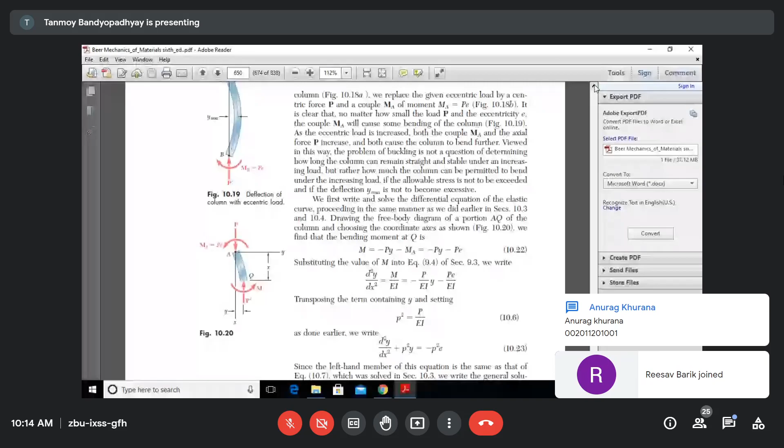Okay, so look at this here. This is the thing that we discussed in columns. Same thing will apply, what you were saying, I'm explaining the same. See, initially the things that we did, we always observed that whenever you are loading the thing, it's along the z direction - meaning there is no eccentricity of the thing actually.

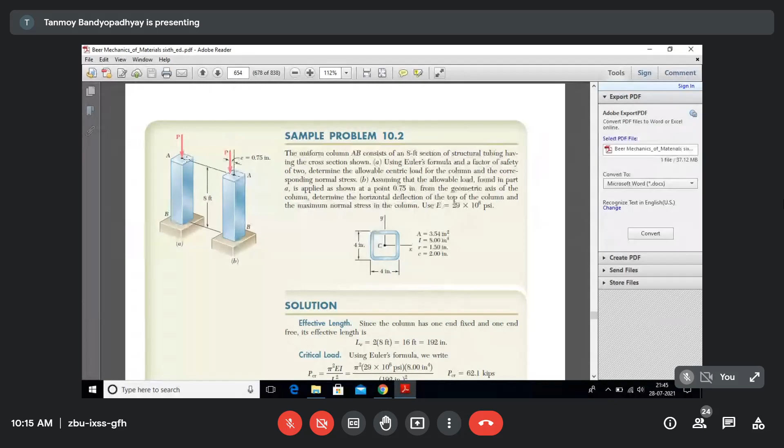But if the load is eccentric, you can see on figure B, the load has been placed eccentrically at a distance of small e. So along with the normal stress you will be having some bending being set up. So that bending moment you have to add on, whether it is tensile or compressive, it will be directly added to the normal stress that is getting developed. So this is the derivation - you can see in this figure, a column with eccentric load.

So for a column with eccentric loading, the eccentricity was small e, and they had drawn an equivalent thing, shifting the load to point C, using the moment couple principle expression that we study in mechanics.

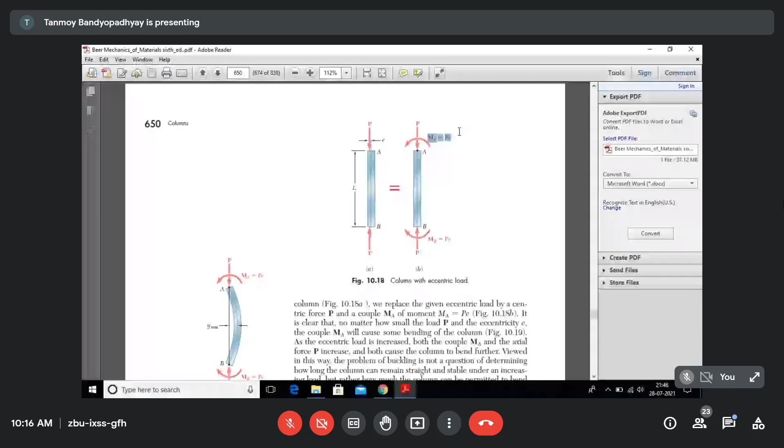Using the moment couple principle, we have to move this force. If I move the load from the eccentric point to the central point, a moment will be induced equal to P into e. You have studied this, the moment couple principle, and we need to find the equivalent moment.

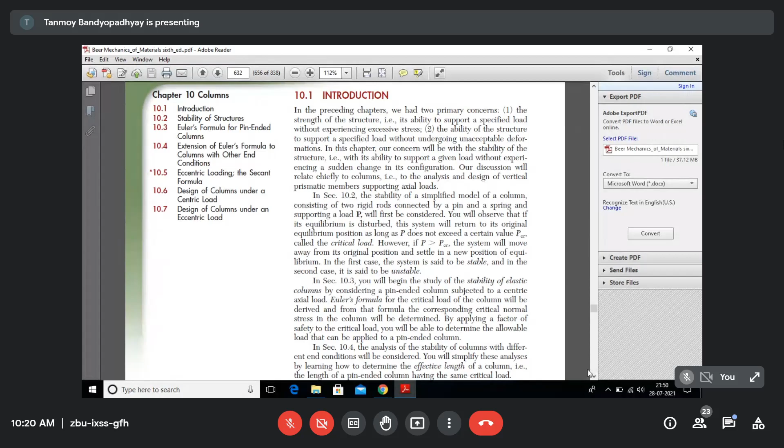So whenever you are loading a column, there is a problem with its stability. If it's a long column, mostly what happens is different from a short column - suppose a brick, a very small piece, doesn't have that length to buckle and all. So if you apply a compressive load to it, it breaks by compression.

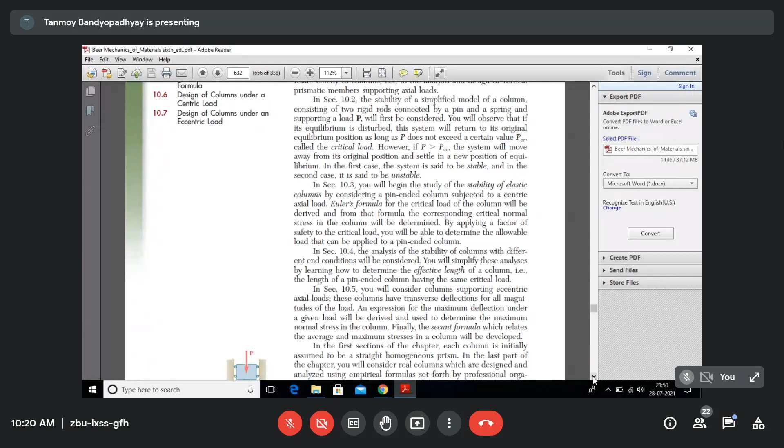But suppose you have a long member, like any column or vertical member. If you compress it, the failure won't entirely be by compression. There will be a buckling effect set up, so it will actually try to bend out. This bending can itself induce failure, not by crushing, but by bending. That lateral direction failure, we call buckling.

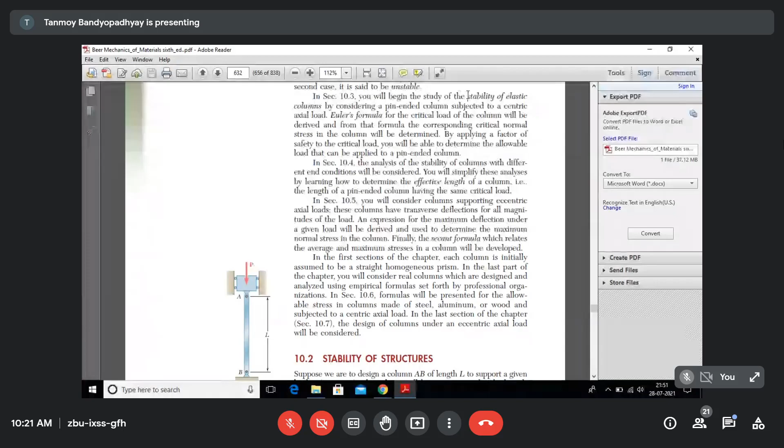So generally it is known as the stability of the elastic column. We have considered that the columns are elastic in nature, and whatever the stability is.

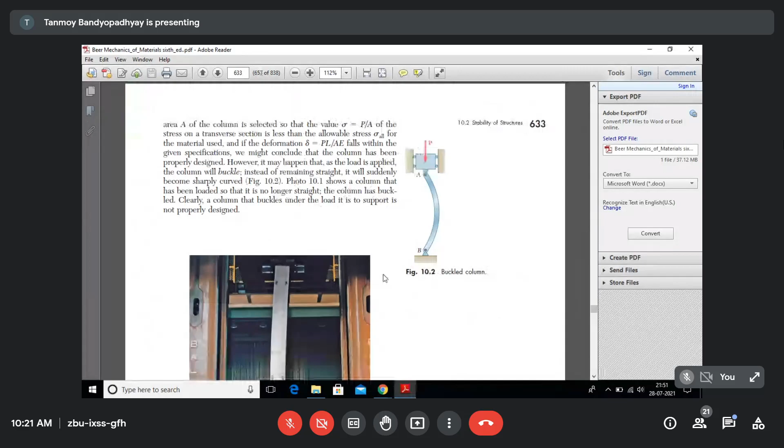In order to arrive at the stability, what we assume is that the column is made up of like a torsional spring. Suppose there is a torsional spring and you are compressing the column AB. We can suppose it is made up of two parts, AC and BC, and at joint C they are joined by a torsional spring of constant K.

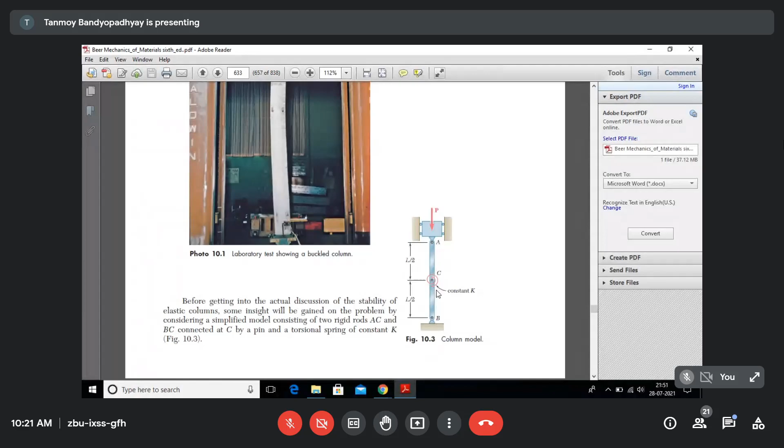So now if I keep compressing, the torsional spring will try to bring it back to its original position whenever it tries to bend, until a point comes where the torsional stiffness becomes insufficient to prevent the buckling of the column, and the column will fail by buckling.

Alright? Hello? Hello, yes sir, alright?

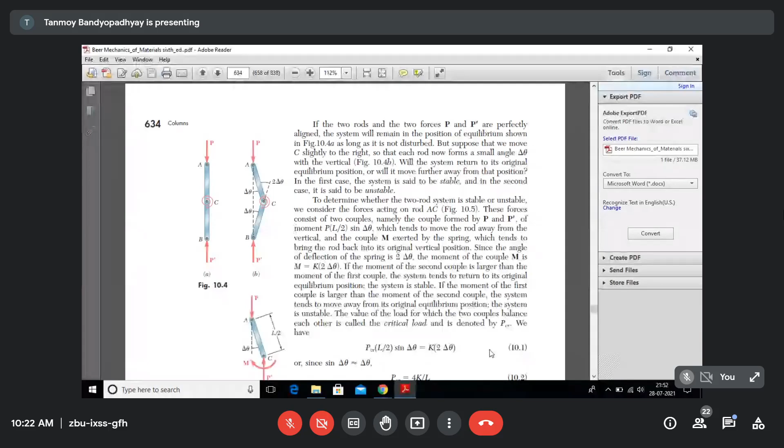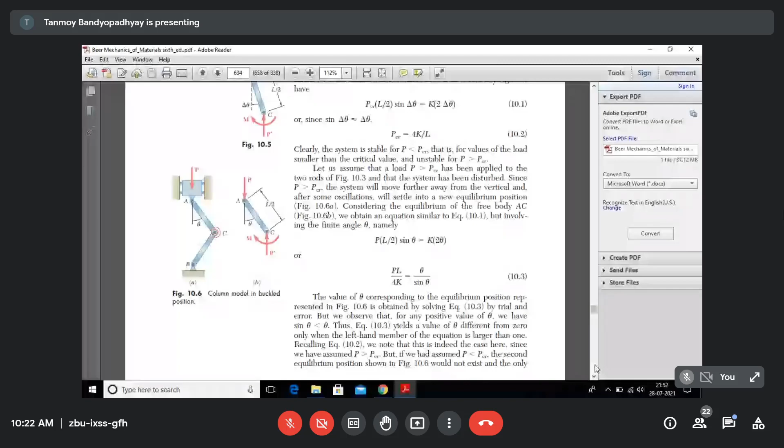Based on that, what we have is something known as the P critical load. If there is a critical load and it exceeds that, it will fail by buckling, or else it will fail by compression. So that's P by P critical we calculate. If P is less than P critical, the column will be stable, and if P is greater than P critical, the column will buckle.

So then we have to consider buckling. Alright, so initially it was a straight line, then after that you have to consider Euler's curve and all those things. Euler's curve is applicable after 89, as you have seen, like LE by K.

The Euler's curve becomes applicable after you cross the limit like LE by K. But for LE by K very small, the leading factor is a straight line, which is the compressive strength. Sigma Y is the compressive strength of the material, that is 250 megapascal. So less than 89, it will fail by compression.

And if you go on increasing the length of the column, or LE by K, as I told, K is the radius of gyration. If you go on increasing LE by K, initially it's governed by a straight line, and after this point 89, if you increase the length further, it switches to a long column. The buckling effect creeps in, where you have to consider sigma critical using Euler's curve, so it becomes a hyperbolic curve.

Here, columns can have many types of pin conditions, end conditions of the column. You could be having various end conditions of the column, and for all the end conditions we have derived the expressions.

For the pinned column, you have to just take a cross section at a point Q, then calculate the forces, and write the differential expression for that. Then, mathematically, you have to analyze that differential expression.

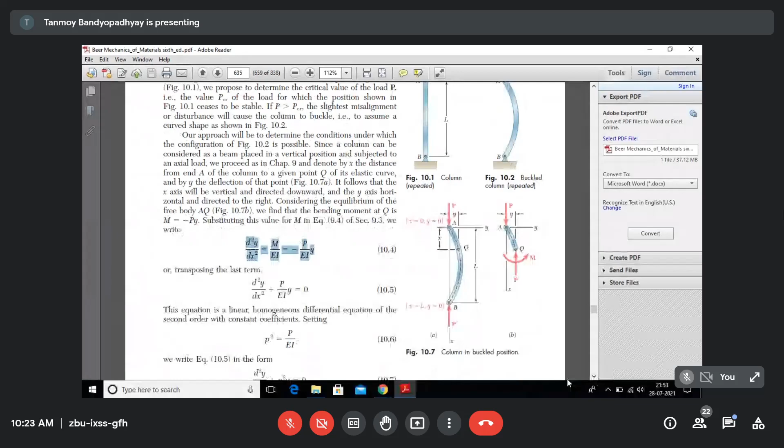So this is a homogeneous differential equation of the second order, for pinned columns. This is the differential equation we got, and its solution will be given by this expression. Now you have to find out A and B, which are unknown, by solving using the boundary conditions of the problem.

For pinned beams, whenever it's pinned at both ends, at the ends A and B it can bend, so there will be no moments, only the deflection will be zero at points A and B. But dy/dx will not be zero.

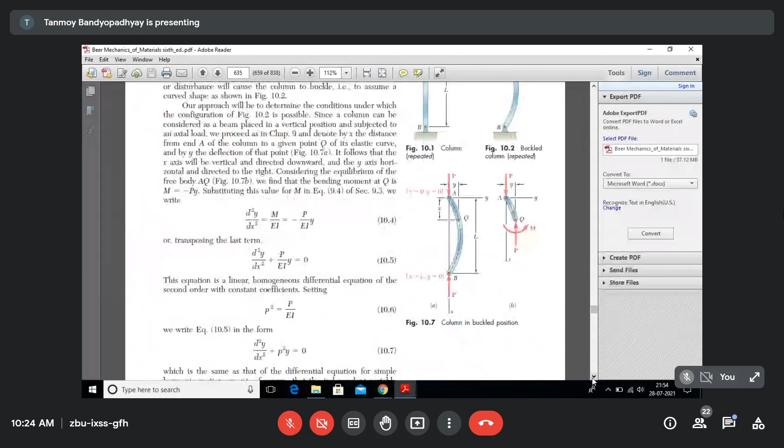So at the points x and y, at x equal to 0 you will be having y equal to 0, and at the point x equal to L you will be having y equal to 0. So you put all the values, and you will be getting the Euler's critical load by this. We are taking the least value of small n, since it can buckle in many ways, so we are just taking the least value. This is the Euler's formula for the pin-ended column.

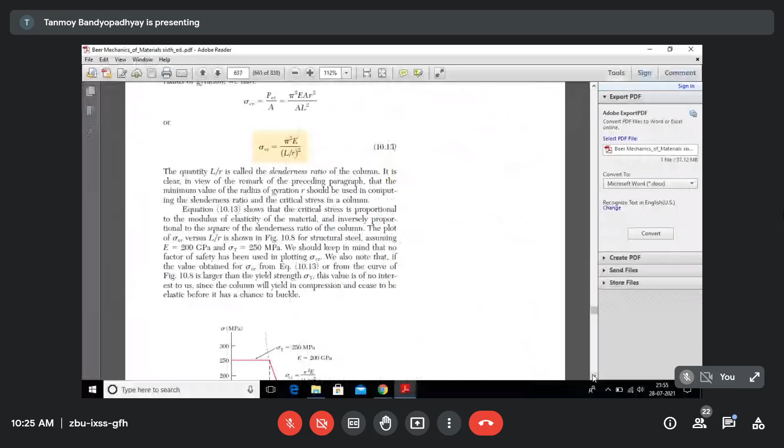From there we derive sigma critical and all those things, like pi square E by LE by K. This LE by K thing is known as the slenderness ratio of the column. It's just a measure of how the column is actually behaving. Based on this LE by K ratio, we explain which zone it's falling into in the buckling curve. If LE by K is less than 89, you have to take compression as the major factor of failure, and if it exceeds 89, you have to take buckling of the column as the major factor for failure.

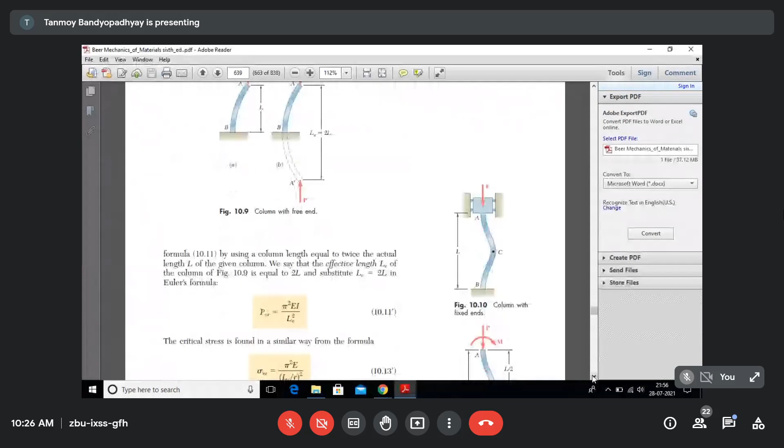So there are many boundary conditions like this. For all the four boundary conditions, the book has done only two, but I have already discussed with you all the four boundary conditions. So this is the second boundary condition in the book.

So this is like, what was this - one end was fixed, the other end was pinned. One end was fixed, other end was pinned, and then we did the same things - there is a compressive force P, there will be a shear force V in this direction, and similarly there will be a V prime in the other direction. Since this end is actually fixed, you have to consider this P prime, as well as V prime.

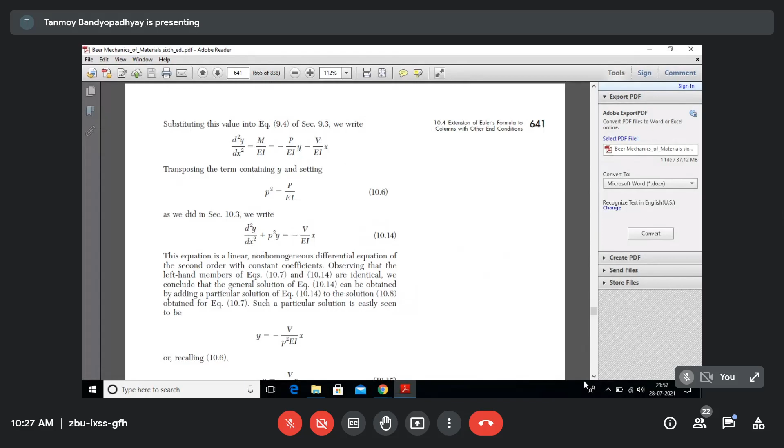So at the fixed end you will be having both those moments, both those forces. Just V - this V thing will be going out when you are taking the particular solution. So this is the expression. When the particular solution comes, that V will actually go out. So here you will do the total solution, and it will come out to be something like 20.19 EI by L square. So if we merge all the things, these are all the four boundary conditions of the column that we could get.

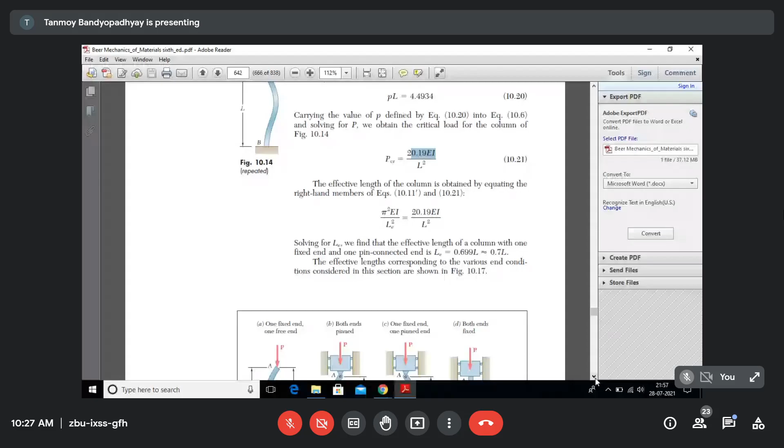So if we merge all things, we will be getting a general formula for all the things, which is P critical equal to pi square EI by LE square. So LE is the equivalent length, or effective length, whatever you say. This effective length is different for the different columns.

So the formula remains the same, just the LE value you have to change. If it is one fixed and other free end, LE is equal to 2L, then LE is equal to L, LE is equal to 0.7L, and LE is equal to 0.5L. So you will look at this a bit, some analysis are given in the book - not much need to go into that, just this one is taken as the basis. This is the basis when both ends are pinned, and based on that all the lengths are defined. So one fixed and one free end means it's equivalent of twice this length. Had it been a pinned end, what is the length you would have obtained?

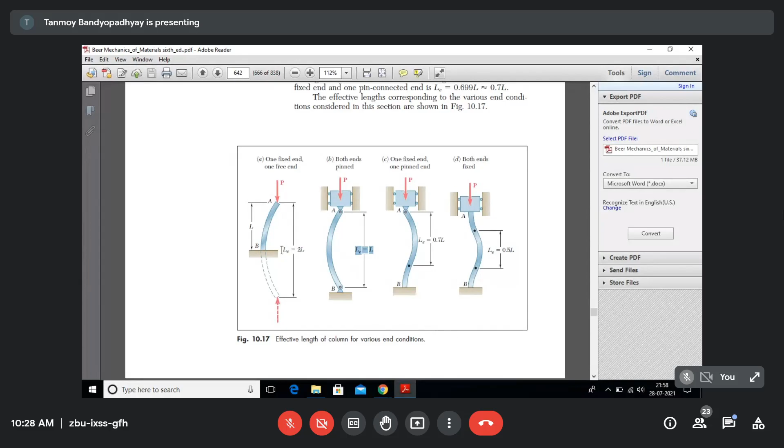So they have done some analysis and all, you don't need to go by that, just follow all the derivations that I have given.

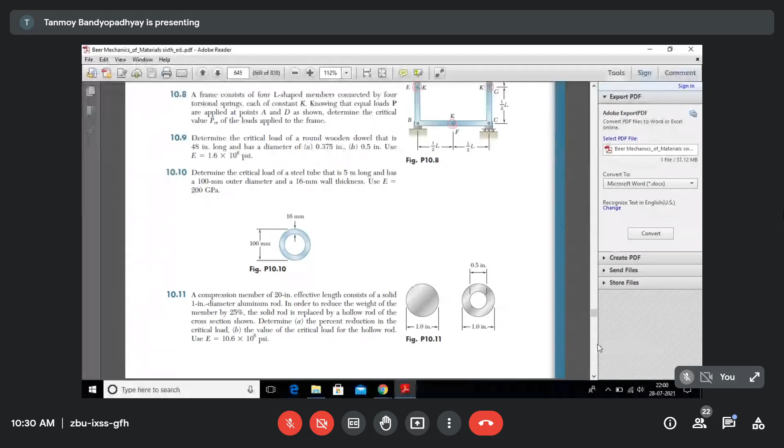Alright? So very easy, just Timoshenko first three problems from here - I already told you, 10.10, 11, 12, 13, 14, that's it. Just these few problems need to be done. You always want a reduction of problems - so 5 problems from here and 3 problems from Timoshenko, that boils down to 8 problems for columns.

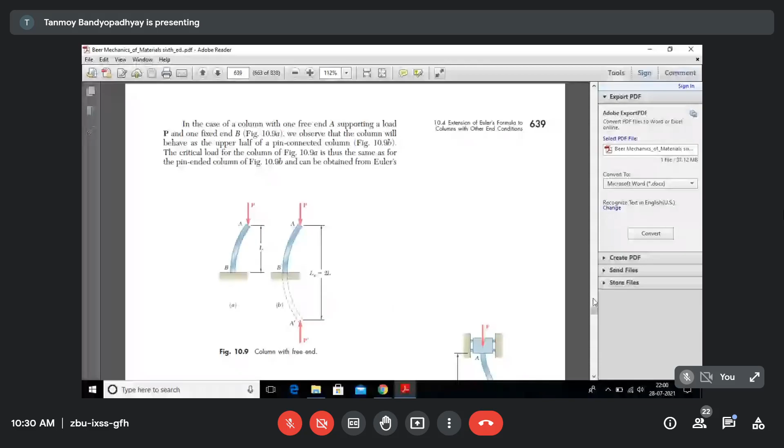Alright, no need to see the derivation of columns, but I hope you understood whatever I described. So unless you get on with the derivations, there is no point in doing the problems.

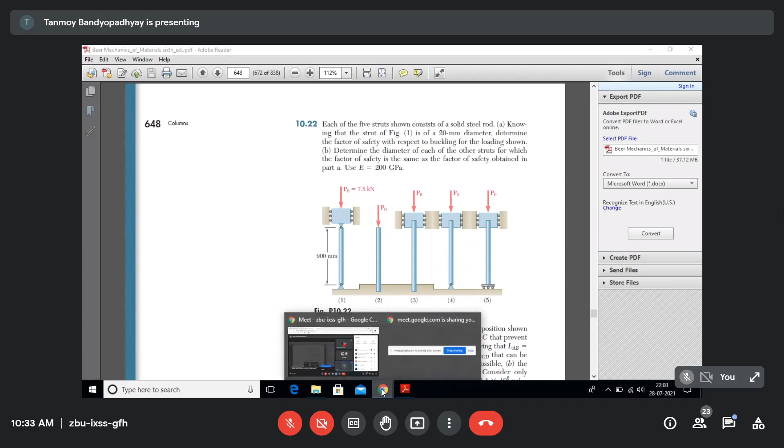So next discussion is regarding the pressure vessels and all. So pressure vessels actually - whatever derivation is given in this book, you aren't doing that. So I don't have the Timoshenko thing actually.

Last day I had shared with you like the Timoshenko things. So you can go to the classroom and follow what I am saying. Alright?

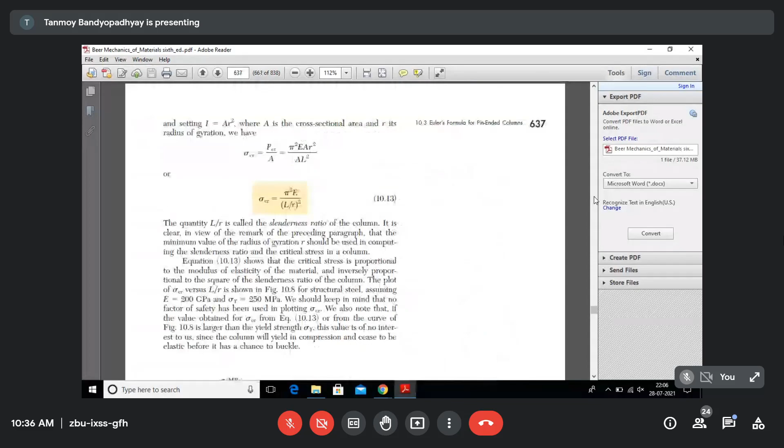If horizontal force isn't there, you don't need to consider that, but if it's a fixed end, meaning when point B actually becomes fixed, at the fixed end you will be having this P prime as well as V prime, so that is why at this point I took both V and P. So in the pinned end that won't be coming, but when it's a fixed end that thing you have to consider. In this derivation, I have taken this V prime because whenever it's a fixed end, B has become a fixed end, so at the fixed end you will be getting this V prime which you have to equate with capital V, right, is it clear now?

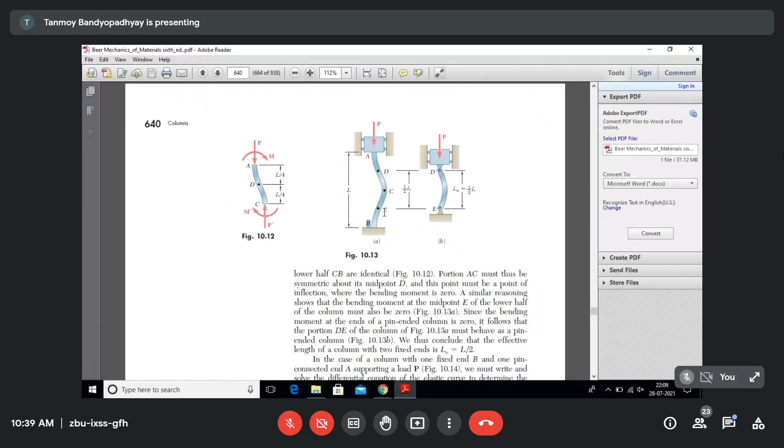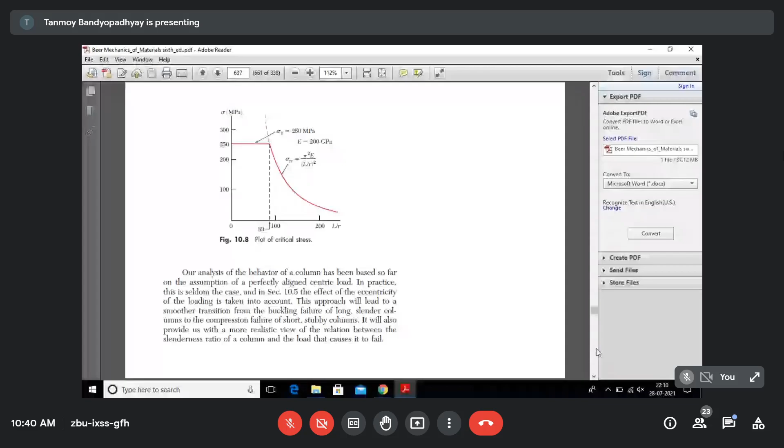In this figure you can see that the bending has started from point E actually, the movement has started from point E, which is why we take the effective length DE, half the length DE.

Only when it's fixed will you have that horizontal reaction, not for the pin end, because the pin end at least has some flexibility to move on the horizontal side, but on the vertical side it cannot move.

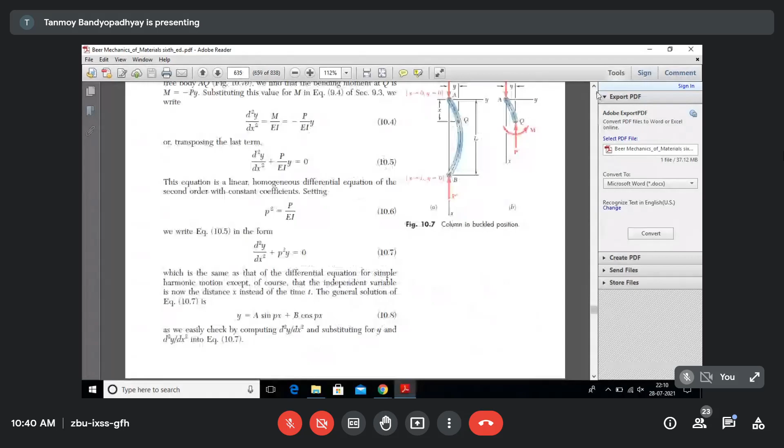If fixed means the end will be going inside that base or foundation, so the B point will go inside the foundation itself, so it has no left-right movement at all, so fixed end is also sometimes called a built-in end.

Built-in means the B point is inside the foundation, it has no flexibility on horizontal or vertical or any side, but if it's pinned, it's just like a door actually, a hinge actually, a door can at least move.

If you move the door, it can move on the horizontal side. Just consider the door inverted, so it can move on the horizontal side. It has flexibility to move on the horizontal side, so that is why there will be no horizontal reaction, only the vertical reaction.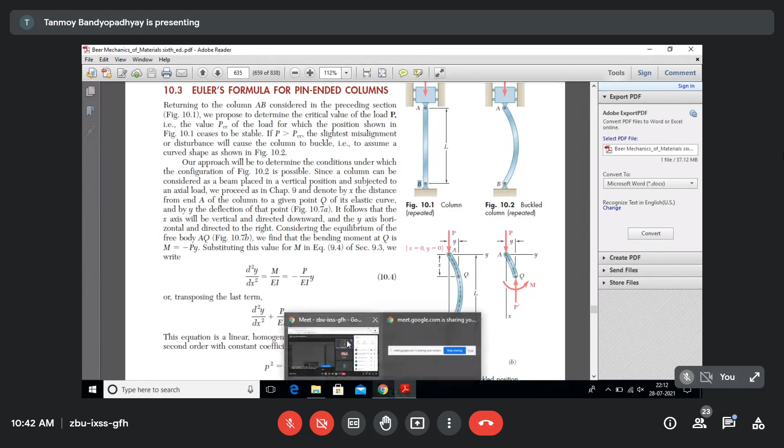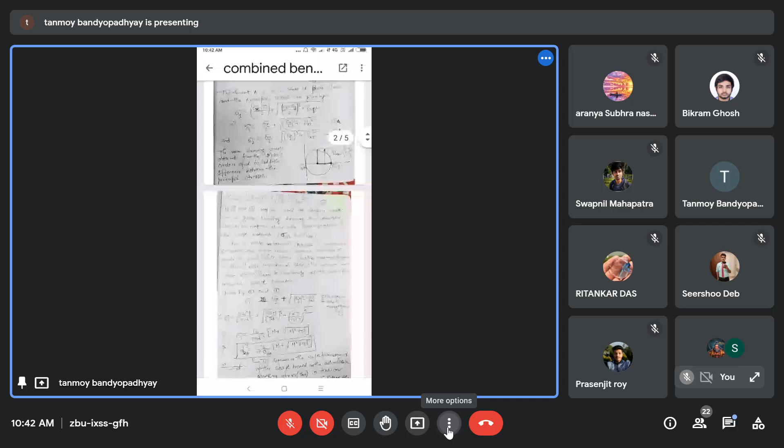I hope I can see the screen also, so you can see like from the classroom I am presenting, so just you can see the screens.

This is the derivation of thin pressure vessel, you can get it from the book of Timoshenko. Pressure vessel means it's like a very thin walled thing, it has to be a very thin walled thing.

There is a classification, either it can be a thin pressure vessel or it can be a thick pressure vessel. Whatever we are considering is a thin pressure vessel, where actually the membrane effects are important, or the wall stresses. So walls are very thin, so they will be having some stresses acting along the wall, along the meridional direction, and there will be a circumferential direction.

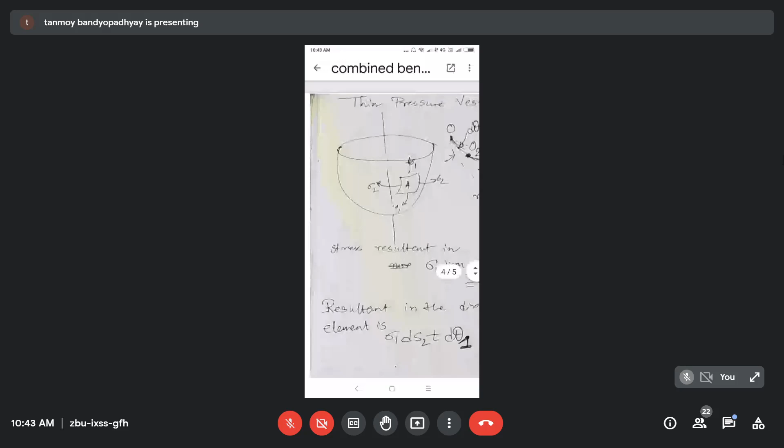So sigma 1 is the meridional direction and sigma 2 is the circumferential direction. Along them you will be having some stresses, sigma 1 and sigma 2. And the pressure of the fluid is known as the bursting pressure. So the pressure P is actually coming out from the thing.

If you draw the normal to the cross section, and then draw the pressure, so it is the bursting pressure. Now if you balance the forces, you have to draw from point O, which is the point of curvature in one direction, and O2 is the point of curvature in the other direction.

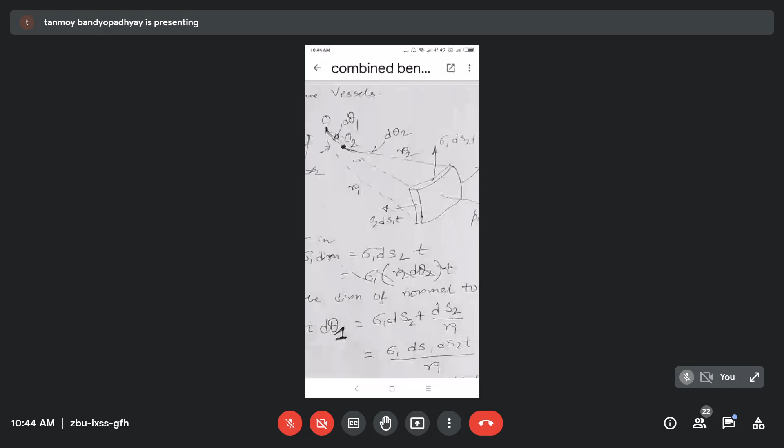So just balance the forces, the same way we do in 2D, you do it in 3D. So you'll be getting the equation for the pressure vessel. This is a very important expression. Break it down: initially write everything - what is sigma 1, sigma 2, what is R1, R2, what is small p, all those things given in the book of Timoshenko. Read them very carefully and then write the things. So it will be like sigma 1 by R1 plus sigma 2 by R2 is equal to P by T.

And if it asks to derive the expression for cylindrical and spherical pressure vessels, you can just do it. But you can do this yourself. You can just show the things for cylindrical, because these are the two basic types of pressure vessels that are part of the picture.

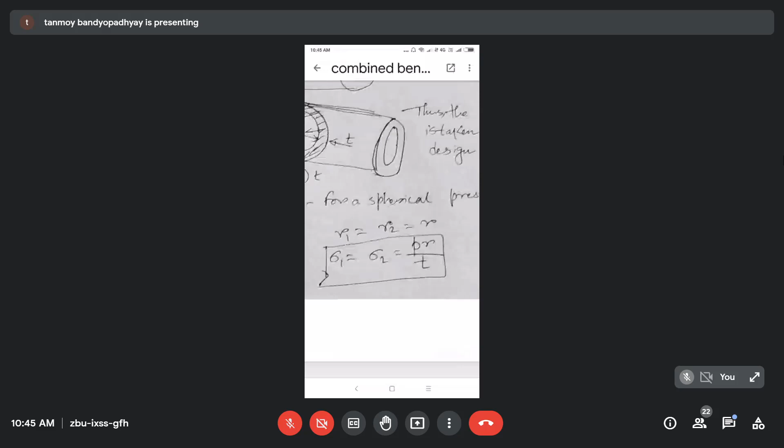So once you get that, for a spherical pressure vessel, R1 will be equal to R2. For spherical, R1 is equal to R2, equal to R, so sigma 1 and sigma 2 are equal, sigma 1 is equal to sigma 2, equal to PR by T. And finally if you have a cylindrical pressure vessel, on the length side R1 will be infinity and R2 will be only R, so you only have one radius of curvature, and in the other direction the radius is infinity. So if you put the value, you'll be getting one expression: sigma 2 is equal to PR by T.

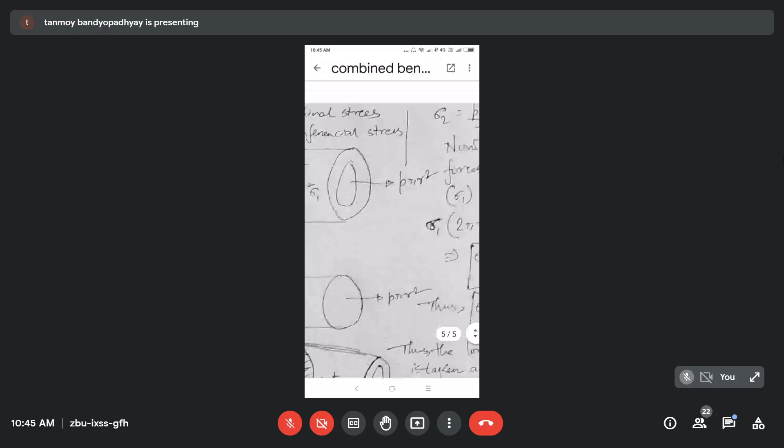Now sigma 1 means the length directional stress - if you want to find out the length directional stress sigma 1, what you have to do is balance the thing. So it's like a long thin walled pipe that is carrying a fluid under pressure.

I have drawn the internal forces on the left face, and I have drawn the actual bursting force, or the force due to the fluid, on the right face. On the right face, I have drawn it as P into pi r square. R is always - for a thin pressure vessel, you always have to take the internal radius. So on the right face, you are having P into pi r square. P is the internal pressure of the conveying fluid. So that pressure of the conveying fluid is P into pi r square, acting on the right face.

On the left face, I have drawn whatever internal stresses are getting generated. Since these are wall stresses, I have taken only the wall - it's a hollow pipe, so only the wall. I have shaded them. So what is the area of the shaded portion? That is 2 pi r into T, where T is the thickness of the wall.

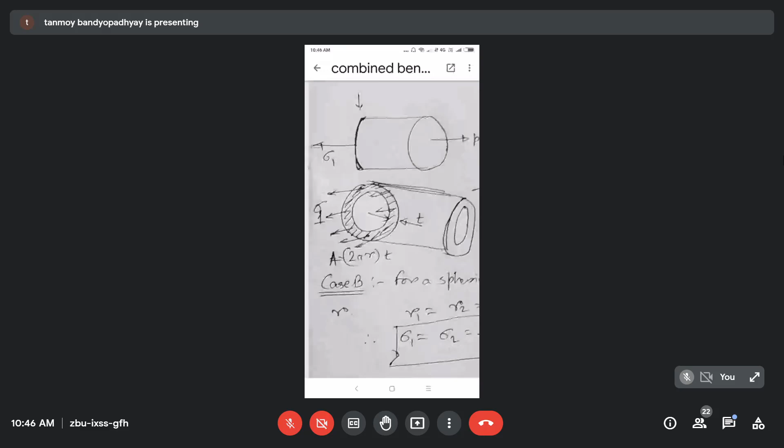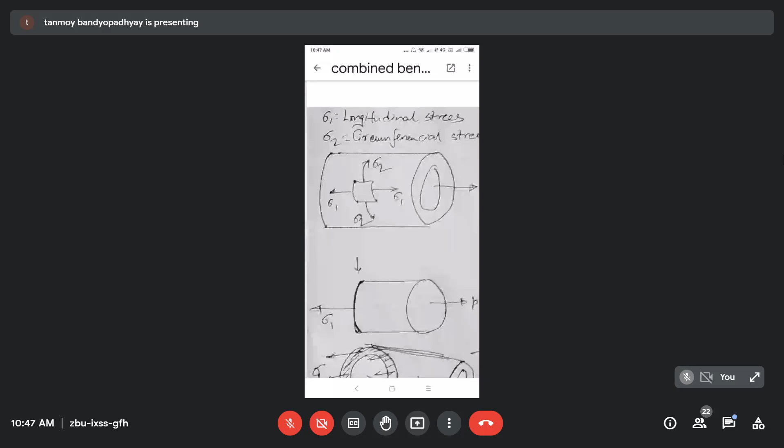So sigma 1 is the wall pressure, or the stress - take sigma 1 into 2 pi r t. Then if you equate it to P into pi r square, you'll be getting the expression for sigma 1. Sigma 1 is known as the longitudinal stress because it is in the length direction, and sigma 2 is known as the circumferential stress, or sometimes called the hoop stress. So whatever is the stress in the circumferential direction is sometimes called hoop stress. You can clearly see here that sigma 2 is the circumferential stress and sigma 1 is the longitudinal stress - whatever is in the length direction is longitudinal, and whatever is in the circumferential direction is the circumferential stress or hoop stress.

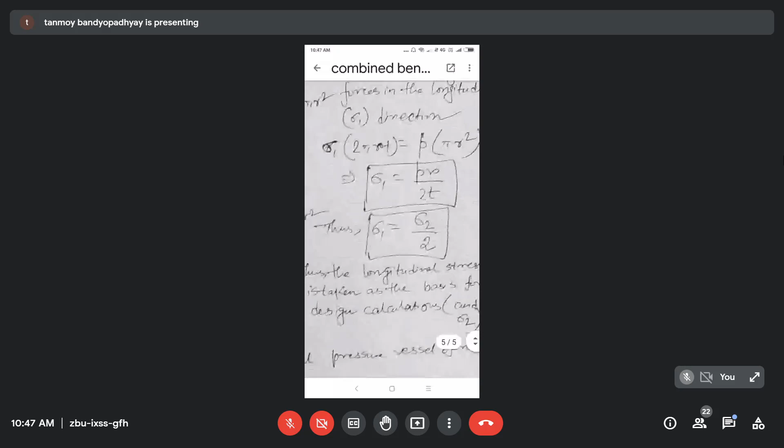Now you can decide, sigma 1 is half of sigma 2 actually. So which one should you use, since the pipe is made of one material having some allowable sigma? Which one should be the basis for design, sigma 1 or sigma 2? You can understand that sigma 1 and sigma 2 are actually the principal stresses in absence of any shear stress, so there is no shearing on the wall. That is why sigma 1, sigma 2 are the principal stresses acting on the thin pressure vessel. So which one will you take as the basis for design, sigma 1 or sigma 2?

Whichever is the lower value. Sigma 2 is the lower value normally, but here sigma 1 is half of sigma 2, so sigma 1 is less. That is why in the design of a cylindrical pressure vessel, you have to take the lower value as your basis for design, which in this case is sigma 1, since sigma 1 is half of sigma 2 and thus the smaller value.

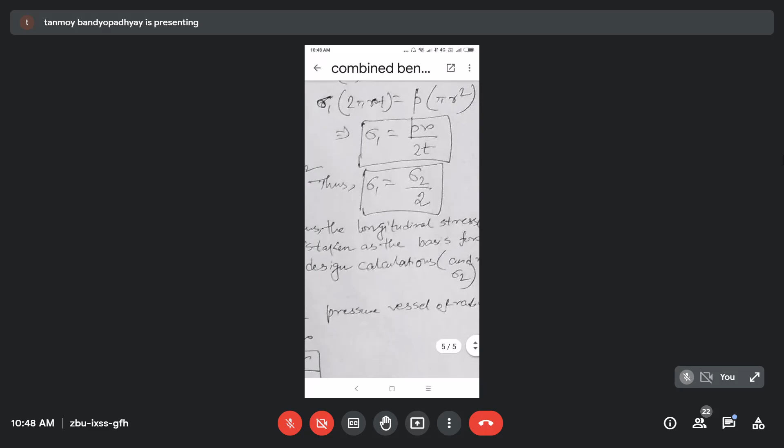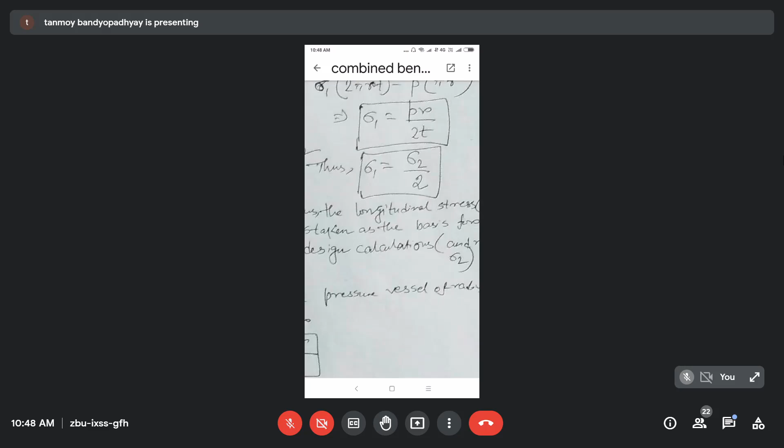So this is the pressure vessel, and the derivation of the pressure vessel is very important. What you have to understand is that a pressure vessel is something very thin, sometimes called a thin pressure vessel. The ratio D by T should be around 10. If it's more than 10, then we call it a thin pressure vessel.

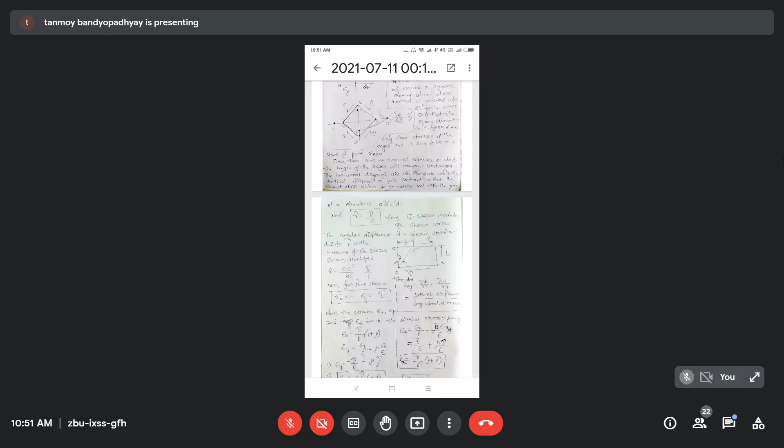So whatever I want to tell you about the spring is, initially you consider that the spring is totally straightened, okay? Totally, it's like a bar under torsion. So if I am having a bar and then I am twisting it and curling it to make it a spring, from there we derived the spring equations.

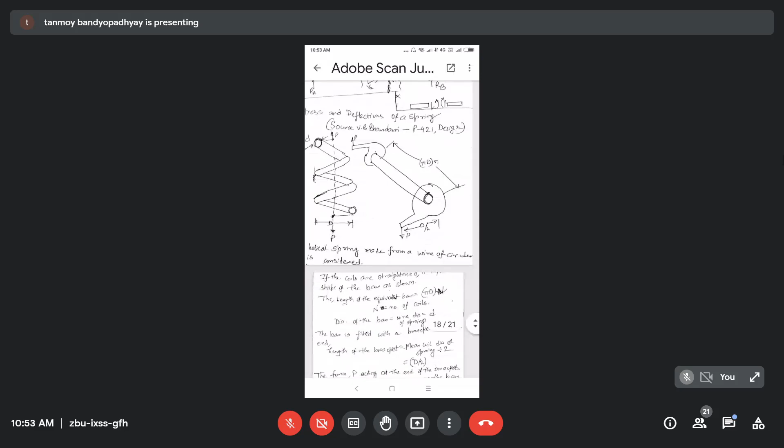So if closely coiled, if pi D is the circumference, and we multiply by n number of coils, we can consider that the spring is actually a bar of length pi Dn. So now on this pi Dn spring, I am applying a force capital P at its ends.

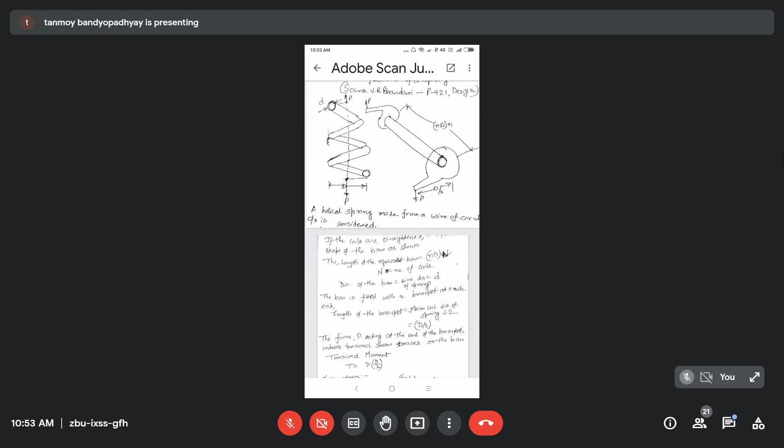So it will be having some torsion. We calculated torsion as T is equal to capital P into D by 2. From there we calculated shear stress, which was 16T by pi d cube, giving us one expression: 8PD by pi d cube.

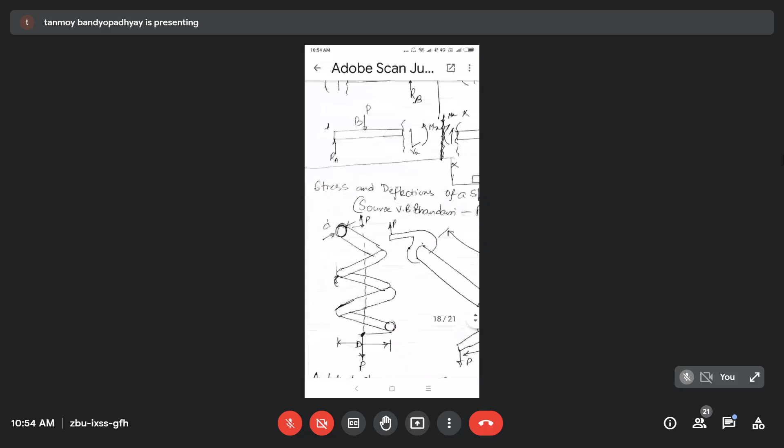Here we missed out two things: one is the effect of direct shear stress, the other is the curvature stresses. We derived those later. Direct shear stress was P by pi by 4 d square. On each wall of the spring you will be having some stresses, that being P by pi by 4 d square.

And the curvature effects we had calculated using an empirical formula known as the Wahl's correction factor, giving k is equal to 4c minus 1 by, and all those things. Take that as a k factor. So if we add those three together, we get the expression for k.

Then from k we calculated delta. To do so, we first calculated theta, this curl that exists, and that theta came out to be TL by GJ. Using TL by GJ we calculated theta, and then the actual deflection of the spring, which was D by 2 into theta.

So this is the expression. Up to this you might be asked to derive 8PD cube n divided by G d to the power 4. So this is the load deflection equation of a spring.

And from there the stiffness will be P by delta. If you substitute P there, it will be G d to the power 4 divided by 8 D cube n. You can see that everything else, G being the material constant, small d, capital D, all those are fixed. So if these are fixed, K is proportional to 1 by n.

So if you cut a spring into 8 parts, each part will be having 8 times the stiffness of the original spring. This is how I derived it. In the book of Timoshenko it's done in a much more complicated and convoluted way, and the picture isn't very clear in Timoshenko, but here at least you can get a picture of how it's made up.

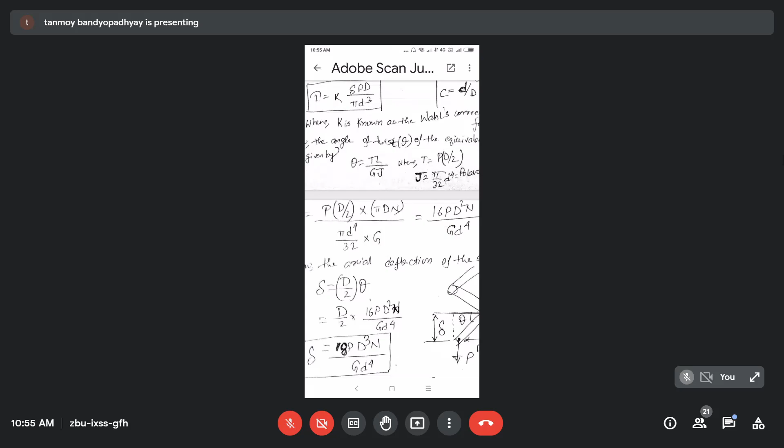That is why, and you'll study this later too, when you study design this derivation will be done again itself. The Timoshenko derivation doesn't need to be taught separately; when design is taught, you'll redo this derivation, and you'll get this derivation itself, not the one from Timoshenko. That's why I did it from this book, and if you do it this way, it's very fine.